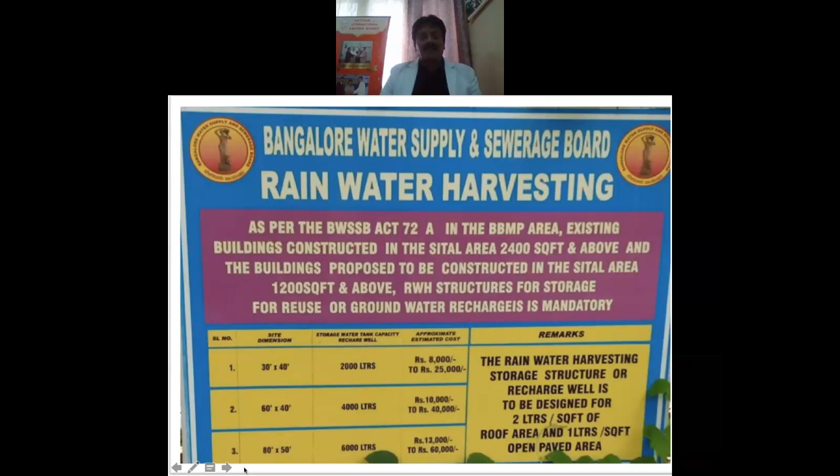Second is the use of faulty filters. More than 95% of the filters available in the market are not self-cleaning. They need to be maintained after every rainfall, which doesn't happen in houses or in the public domain. So after one or two rainfalls, these filters get clogged, and the whole rainwater harvesting system is for a toss.

When installing this kind of system, one thing you have to be very careful about: when putting a vertical pipe, just clamping it with a C-clamp is more than enough. But if you use the same C-clamp for a horizontal pipe, the whole system fails, because the weight of the pipe as well as the weight of the water when it's raining is on the clamping system. So the clamping system has to be very strong.

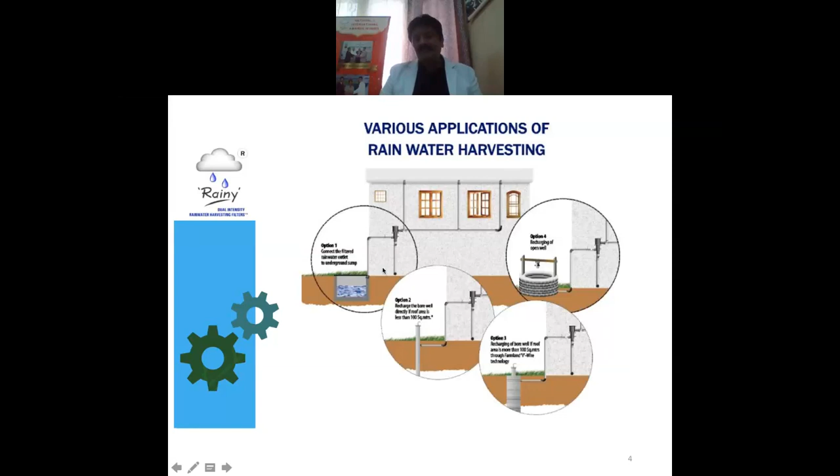These days, when we use hollow bricks for construction, it becomes even more important to fortify the clamping system so it can take the load of the pipe as well as the weight of the water, so it doesn't come off. Majority of the time, wherever we have seen, because of these kind of wrong clamps being used, the whole system comes off within 1 year. That is one of the reasons.

If you are not able to clean the leaves, dust and debris, the organic matter starts decaying after 45 to 50 minutes of falling. Then when there's a next rainfall, the whole degraded material passes into the water, and that's the reason you hear about worms growing in rainwater or rainwater smelling.

Believe me, rainwater is the purest form of water. If rainwater is stored in a tank with a closed cover where you don't allow sunlight and air, you can keep rainwater for 100 years. There are instances in India proved in Rajasthan and Jaisalmer areas, where old Havelis had rainwater tankas, hundreds of years old, which were closed. After 100 years, when they were opened and the water was checked, it was as pure as when it was put in. So rainwater is the purest form of water, which can be stored for 100 years without getting contaminated or stale. You just have to take care not to allow light and air to interact with it.

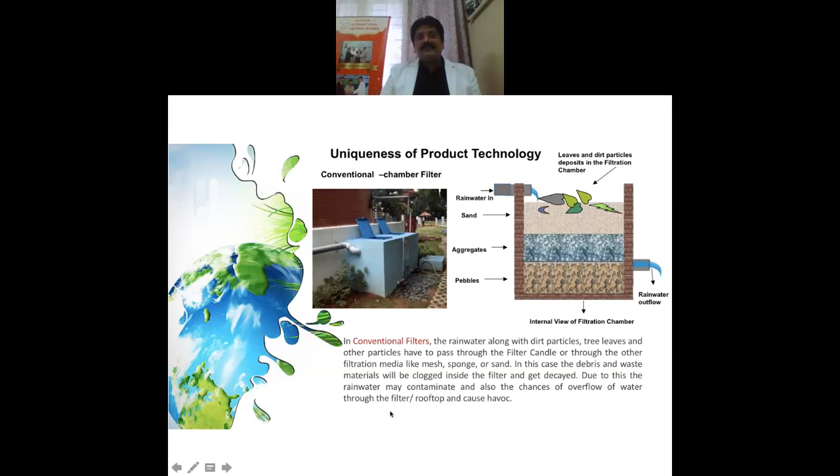Here are the filters you commonly see in the market. At the bottom side, you have a ball valve in all the filters. Whenever it rains, all the dust and debris come and settle down near the bottom of the filters.

And every rainfall, you have to go and open this ball valve, which in our busy schedules we fail to do. And because of this accumulation of dust and debris there, if you are not removing it after one or two rainfalls, the whole pipeline will get choked, and then it starts flooding on the roof. So that is one of the major reasons why rainwater harvesting systems have failed. Next.

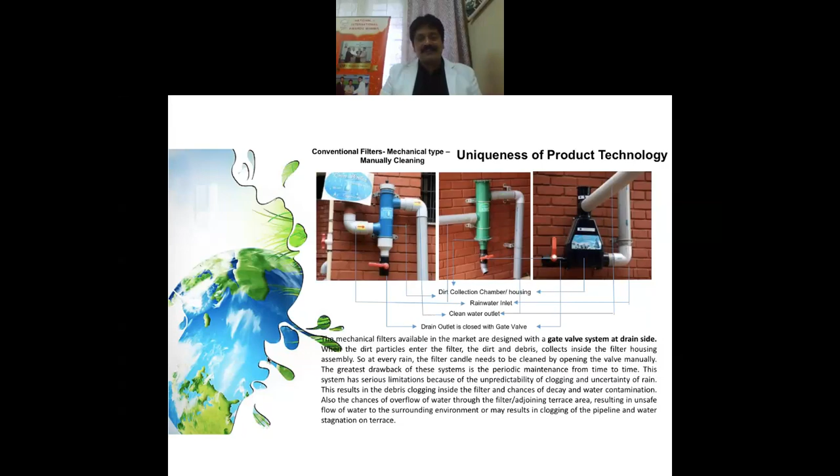Now in India, you will find the first of its kind filter which is self-cleaning and maintenance free. Why is it maintenance free compared to all the other filters available in the market? These filters are open-ended, auto flush-out filters, wherein all dust, debris, everything goes out automatically and the clean water comes out on the other side. These maintenance free filters have been developed after research of the last 5 years. Next.

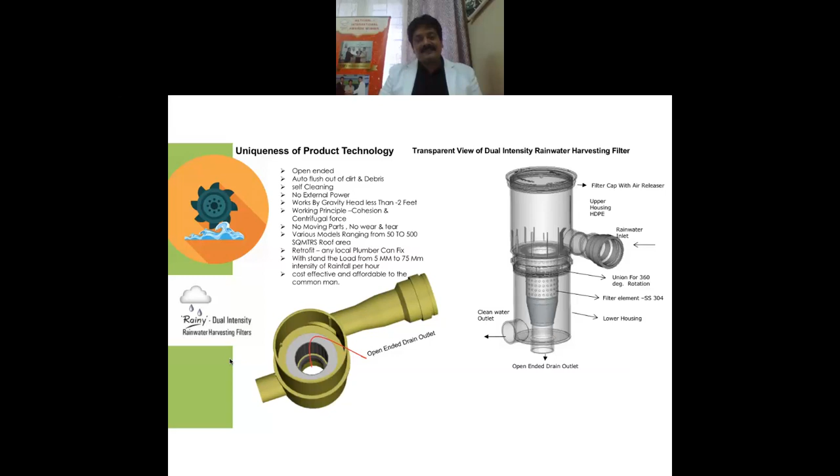In this filter, you can see on the left hand side the cross section of the filter. Here, all the dust, debris, everything falls out automatically, and the clean water comes out on the other side. One more advantage of this filter is that the first 90 seconds of water goes out. This filter works on cohesive force and centrifugal force. Once installed, for the next 30 to 40 years no consumables are required. Nothing needs to be changed.

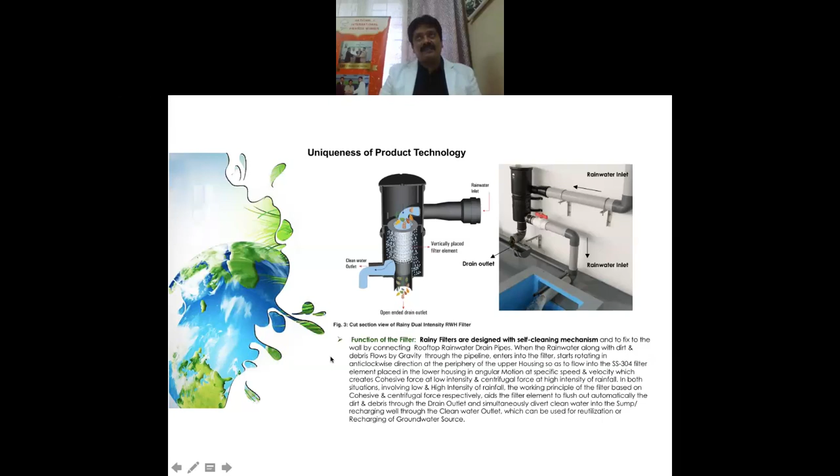So that makes it one of the easiest to install, and it is a retrofit filter. These are the kinds of filters which are available in the market, and they have become very popular today, where people have started using rainwater in a bigger way. Next.

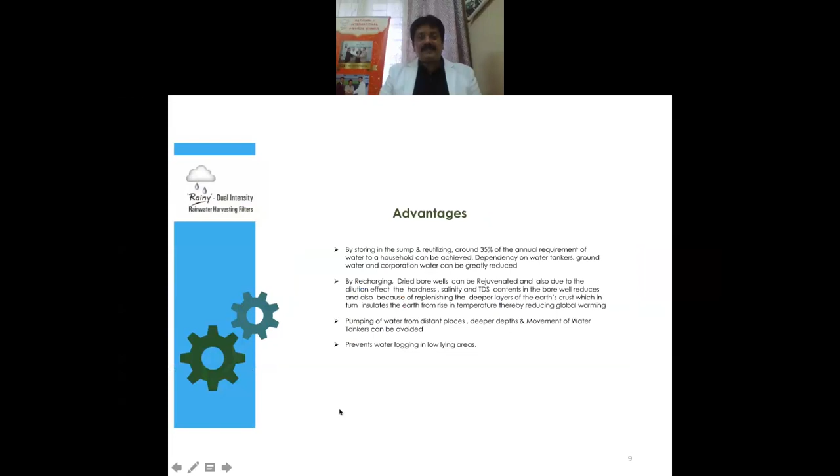Today people have understood the importance of rainwater everywhere, and large industries, schools, apartments, everybody has started understanding the importance of rainwater and adopted it. By adopting rainwater, you are not only doing a service to mother earth by saving water. From a commercial point of view also, the return on all the investment you do for rainwater harvesting comes in hardly 3 years' time.

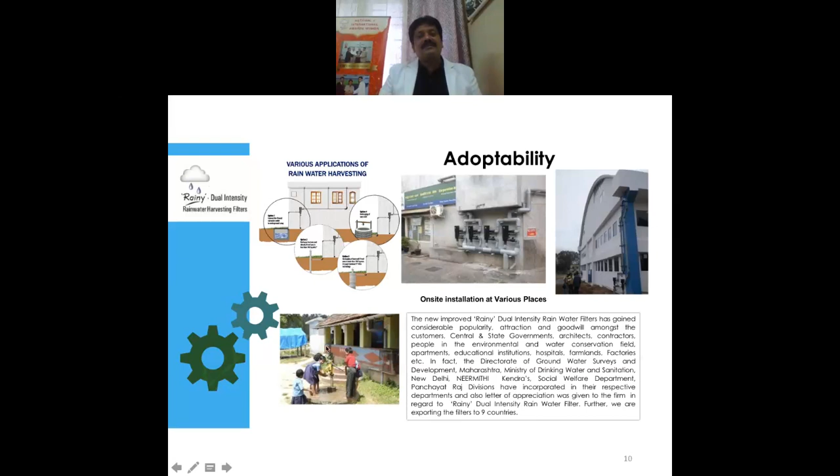Because you're saving on your water bill: for at least a minimum of about 150 to 180 days, with your existing tank, you can have enough and more water, so that for those many days you need not buy water from the BWSSB or your water supply, and you can save on your water bill. And this is a one time investment; it can run for at least 25 to 30 years without any problem. Next slide please.

See, today each and every state has started giving some perks to adopt rainwater harvesting. This slide you can see is from Bhubaneswar, Orissa, wherein the government has made it mandatory for everybody to go for rainwater harvesting. It is not only mandatory; they provide you a subsidy of 45,000 rupees if you install rainwater harvesting for your house.

We have done more than 2 lakh installations in Bhubaneswar and other districts of Orissa, wherein the government is giving you a 45,000 rupees subsidy to install a full-fledged rooftop rainwater harvesting and borewell recharging system. So today, the government is taking more interest. You have seen that the Jal Shakti ministry, a new ministry, has been formed this time, wherein they have allocated more than 3,000 crore rupees just to create awareness about rainwater harvesting. Next slide, please.

Next slide. Yeah. One more important aspect is recharging the groundwater. You have seen that groundwater is falling very critically. Every year they say the fall is more than half a meter in some places, and in some of the critical dark zones it is more than 2 meters. This is going on very drastically, and at this rate we will probably surpass the date given by the NITI Aayog for running out of water.

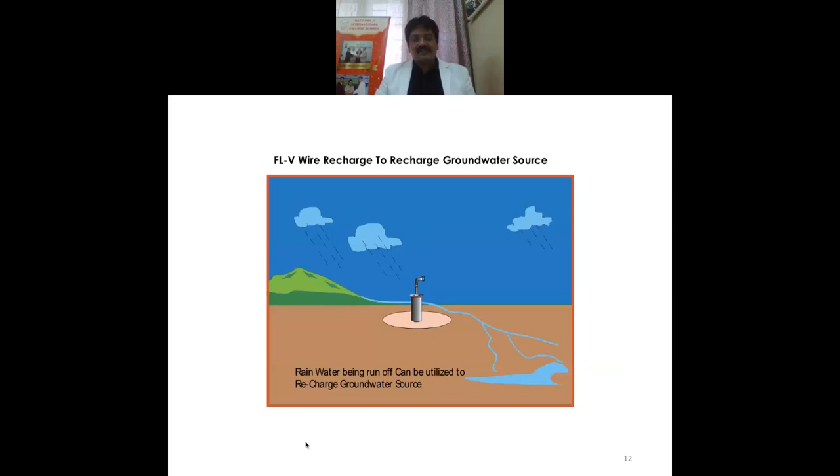Everywhere it is, you can see on the right hand side. Everywhere the government tells us that we have to go for pits: make a pit of about 15 to 20 feet, then fill it with gravel and brick bats, and then leave the water. But by our last 20 years of experience, we have seen these kinds of pits help us only

to recharge the subsurface. And if we had wells around, this would have been the best option, because it will recharge the subsurface. If you have the well and you are able to remove the water again and use it, then this is the best system. But now we have forgotten the wells, we have forgotten our olden knowledge. Our forefathers were more knowledgeable in water than we are today. They had enough and more water.

In those days when Kempegowda ji built Bangalore, they say there were about 970 lakes here. Today, in the name of advancement, or in the name of calling ourselves more intelligent, we have closed those lakes and made them into industries, bus stands and railway stations. Our own Majestic bus stand is Dharmambudhi Kere, and our stadiums were all Kere, meaning lakes.

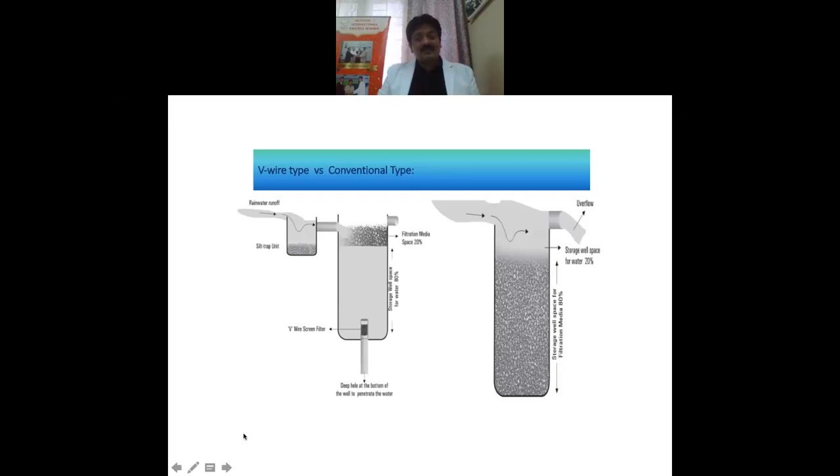Today we thought we don't need this, because in 1970 the borewells started. That is the period when we started drilling borewells, and today you'll be surprised to know that we have more than 22 lakh borewells in and around Bangalore. So where are we heading, if we put these kinds of straws into mother earth in this small area and extract water without recharging? How many days do you think it will last?

Because in the earth's crust there is no mechanism to produce water. The water which has taken millions of years to accumulate there, we are just putting motors in and extracting. That is the reason that out of 10 borewells, as I said earlier, 6 borewells fail, and hardly 2 remain after 1 year. So this is what is happening.

So what will happen to the next generation? Ashok sir and I have completed half of our lives and have hardly a few years left. But what happens to the next generation? What happens to your son, your grandson, and my young engineers who are listening to us? What will happen to you?

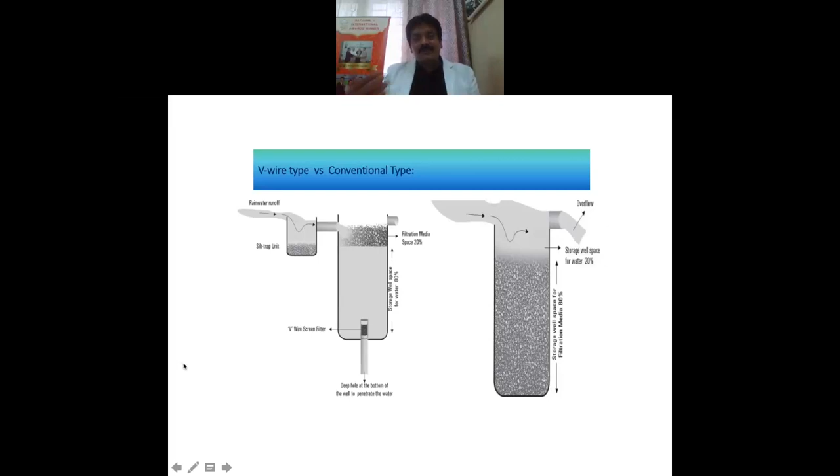Next. According to the BBC report and NITI Aayog, Bangalore will be the second city in the world to run out of water, and that too not very far off. It is 2025. They say 50% of the population will have to be evacuated. Imagine what will happen to these high-cost apartments and high-cost land when we don't have water. Can you imagine one day without water?

If you go to the Sarjapur area and North Bangalore, water tankers today charge 200 rupees for 1 kiloliter of water, meaning a tanker costs somewhere around 1,000 rupees. If this is the state, do you think we can buy water at that rate and survive? It is really impossible to think of.

I have seen in Sarjapur where they made swimming pools during the sale of the apartments. Today, those swimming pools are used to store rainwater. You'll be surprised to know they have converted one of the swimming pools to store rainwater. That is the stage we are heading towards.

Now coming back, I was talking to you about recharging pits. Recharging pits don't help to recharge your borewell. The best example is the many lakes around Bangalore. Each of the lakes has water 365 days. In South Bangalore we have Yediyur Lake, in North Bangalore we have Hebbal, and in the center we have Sankey Tank, Halasuru Lake and others. These lakes have water for 365 days.

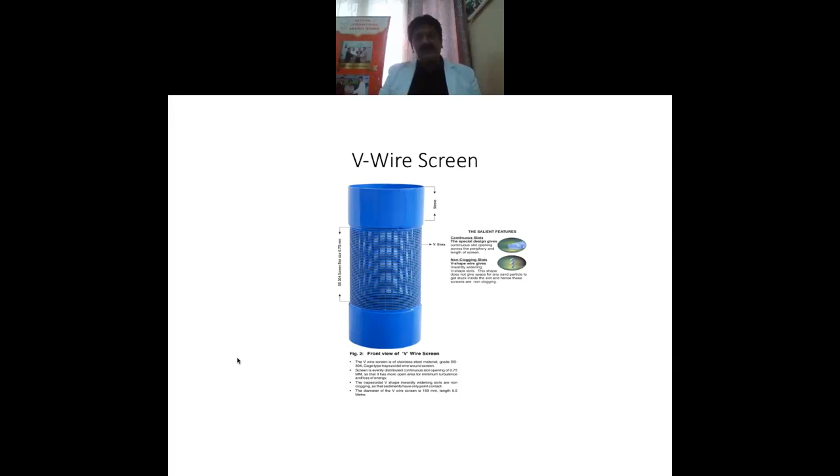Next slide please. So with our continuous research, we developed a system called the V-wire injection well, developed by our company Farmland Rainwater Harvesting System. In this V-wire injection well, we first do a geophysical survey and identify the first permeable zone.

After this overburden of clay and rock, we go to the first permeable zone, where we find fractures or we have got sandy loam soil or weathered rocks. So we drill it up to that level. An 8.5 inch borewell is drilled to that depth.

Once the 8.5 inch borewell is drilled, we use one special component called a V-wire screen. This V-wire screen is fixed at the bottom and is connected to the pipe, which is zigzag perforated high density polyethylene. In the 8.5 inch drilling, we put a 5 inch perforated pipe, and the space in between the 5 inch pipe and the 8.5 inch drilling we fill with pebbles. Then we create this kind of structure. You can see a structure over here, a kind of system.

In this well, we keep the whole well empty. Generally in the pits, they ask you to fill it up with brick bats. But we keep this whole well empty. Only at the top level we put the filtration media. We fortify this filtration media with charcoal, chlorinated activated carbon, silica sand, gravel, and pebbles. And then this is connected to a silt trap.

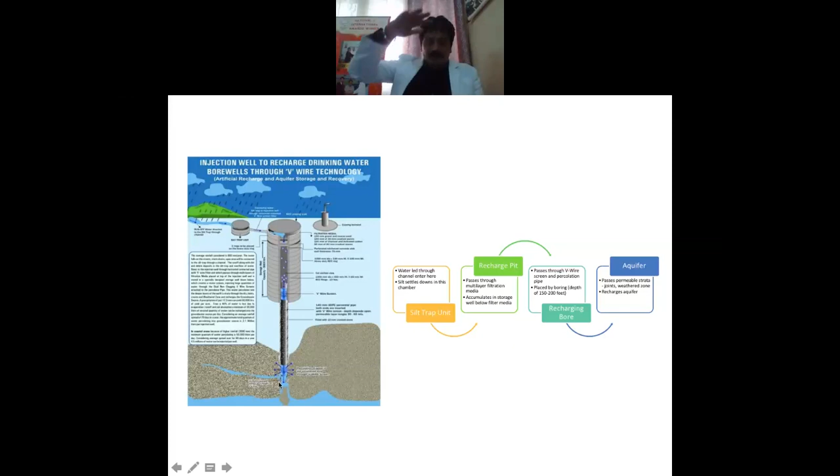If you measure the pressure at the bottom, you will find 4 bar to 6 bar of pressure created at the bottom. With that pressure, it opens up all the dry joints and cracks, and the water is stored there. Next.

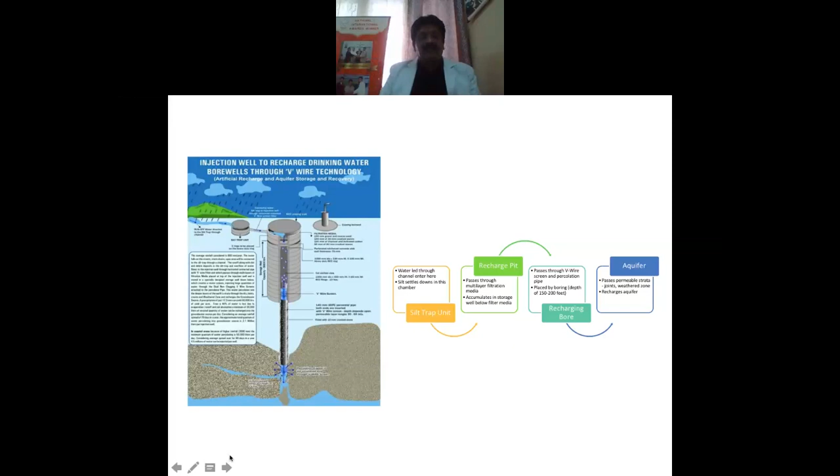We have installed more than 18,000 such injection wells throughout the country, and even dried borewells have been rejuvenated, because, as I told you, there is a huge potential of surface runoff water. Here in this slide, if it had rained, all the water would have gone down, and our borewell is at the right hand corner. You can see this borewell is at the right hand corner. So we installed one injection well system.

All this water, which would have otherwise gone to waste and caused water logging at some low-lying area, we allowed to go into the silt trap, and from the silt trap to the injection well. Generally we make the injection well about 15 to 18 feet away from a drinking water borewell. As I said earlier, this water is filtered through the filtration media and allowed to go to the first permeable zone. Thereafter it gets filtered through the earth crust and then reaches the aquifer.

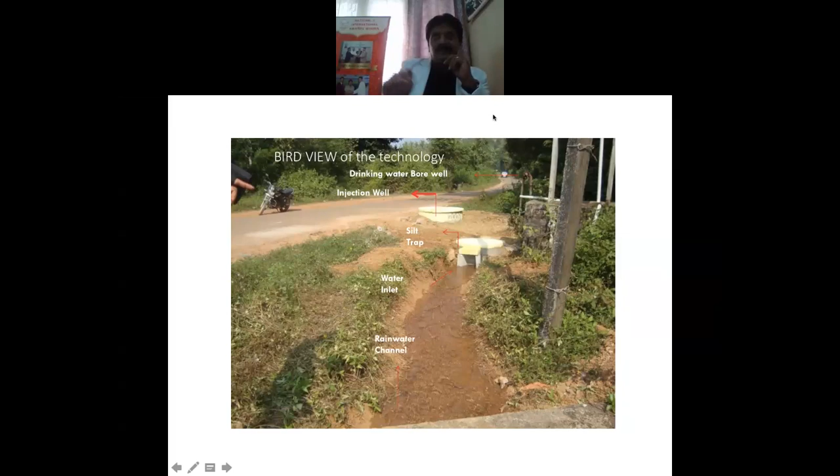You'll not believe it if I tell you 1 meter by 1 meter of compressed earth is the best filter in the world. No other filtration unit can match that kind of filtration. So the water is filtering through the earth crust, because our borewells are 800 to 1,000 feet deep, and we are just leaving this at the first permeable zone, which we generally get at a depth of about 140 feet to 240 to 250 feet, depending upon the different zones. Next slide, please.

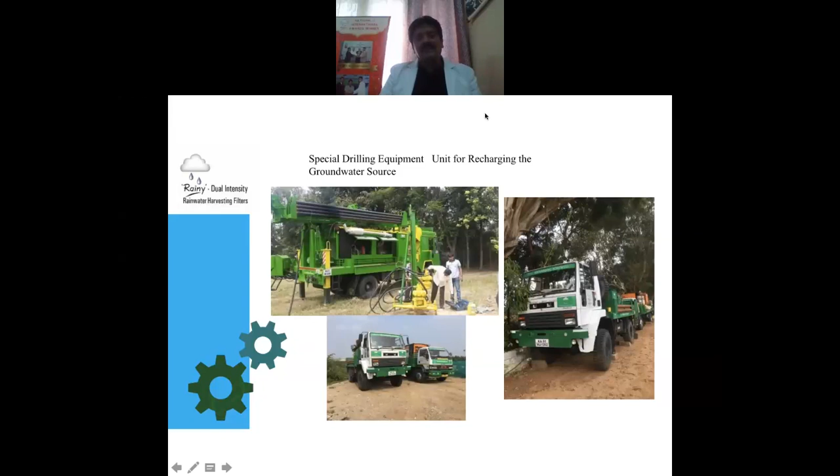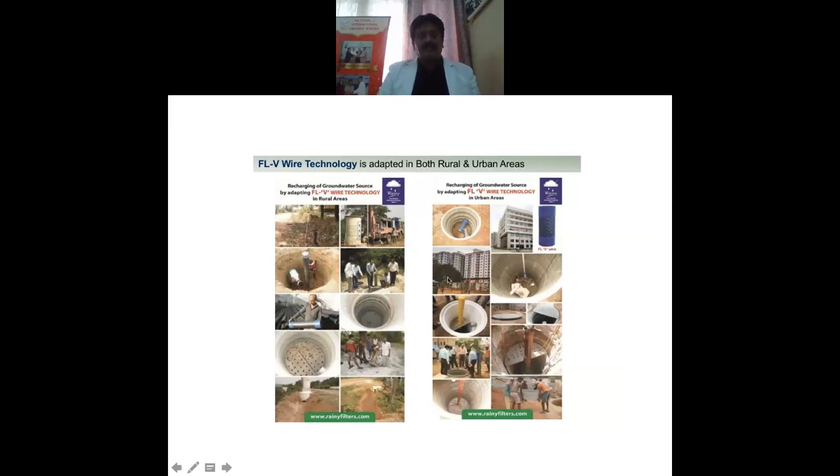These kinds of injection wells have now been used in urban areas, in the cities where there is a lot of waterlogging. You can see in Bangalore, if it just rains about 40-50 mm, the whole of Bangalore is flooded. Everywhere there is water stagnation, and the majority of the water stagnation is in the low-lying areas, where there is a loss of life and property.

Next slide, please. These have been proved and tested in each and every department of the Government of Karnataka and India. The majority has been in pilot projects. They installed it, and once they were successful, they were replicated in other areas. Next slide, please.

This is one of the beautiful case studies of one Mr. Bettamaraiah, a farmer near Tumkur. What happened was, when we met Secretary Sri Naveen Raj Singh sir, he said, I see a lot of good presentations from you, but I want to see how it happens in the ground reality. What is the ground reality?

So we were provided with one dried borewell of this farmer. He had about 3 borewells, and all of them had dried. Because there was no water available and the land was totally dry, his children had moved to the cities to work and earn. So we took up that borewell and recharged it. Fortunately, we had 2 very good monsoons after the recharge, and we could recharge the dried borewell.

You can see this photo was taken in deep summer. Only his land is green, and the rest in the backdrop is all dried. Because the water table came up, we could implement a solar pumping system. If there is a deep borewell with a deep water table, we still don't have sufficient pumps which can lift water from very deep aquifers.

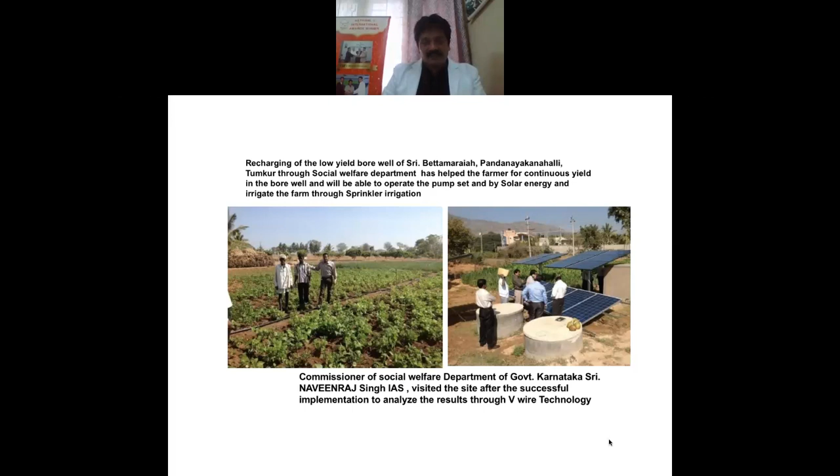A lot of industries have gone for rooftop rainwater harvesting, wherein they are using this rooftop rainwater even for drinking, with small filters adopted. You can see on the left-hand side, all the water is collected and passed through the Rainy filters, and then we have activated charcoal filters installed here, and this water is being used for drinking. This is one of the installations at Khanija Bhavan on Racecourse Road. Next slide, please.

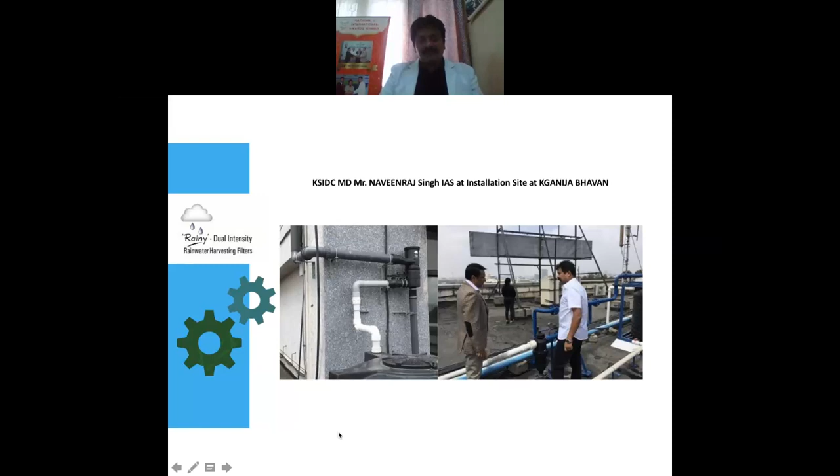In the majority of rural areas, in their drinking water projects, these injection wells were adopted. In Chamarajanagar, we installed more than 240 injection wells. When we applied for the Times of India Earth Care Award, a team of about 12 members, which included eminent scientists and people from different walks of life, came and visited Chamarajanagar. We had done about 240 recharging installations in 2010, and we applied in 2012.

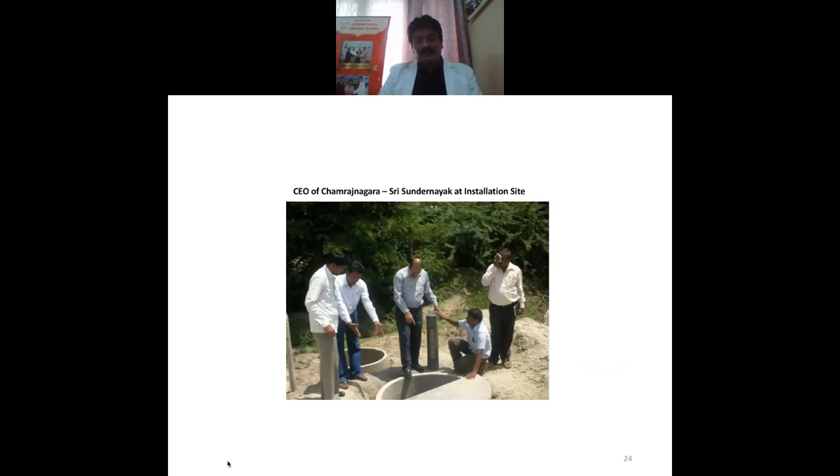When they visited Chamarajanagar, there had been 2 years of continuous drought and scanty rainfall in those areas, and they were surprised to find that only those borewells which had injection wells were working. We got about a 5 lakh rupee cash prize from Times of India for that project. Next. And then these were implemented and extended to more villages, because there were huge success stories. Next.

Here you can see these are in major IT industries which have very big campuses. Because the majority of their campuses have only buildings and paved area, huge amounts of water used to go out from these campuses. You can see the swales here. So we installed these injection wells in the swales, so that whatever water is on their campus doesn't go out. So the campuses became zero-discharge campuses.

One of the campuses in a software park, we did it in Chennai. There, 40% of their annual requirement is met by rainwater alone. And you will be surprised to know that the campus has 25,000 seats.

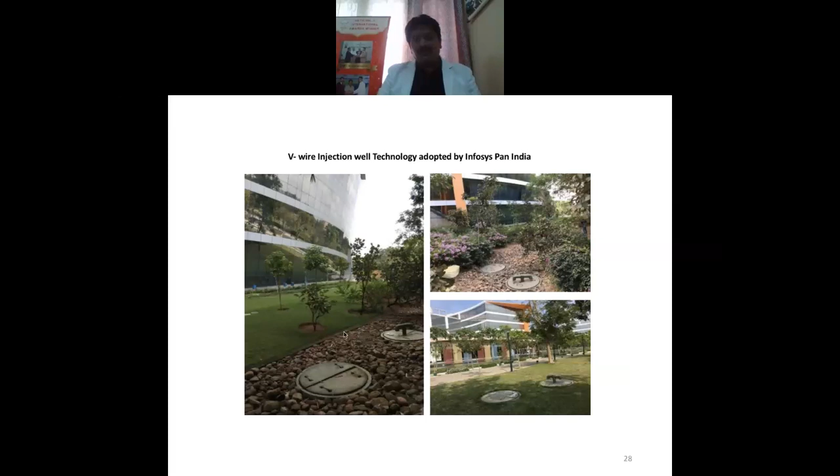With 25,000 seats, with their staying facilities and all, still they could do that; 40% of their annual requirement can be met by rainwater alone, and they recharge the groundwater in such a way that a lot of water was available there, and whatever water was falling in the campus is not allowed outside.

Here also you can see this water from the roof is brought, and then we created large tanks. Huge tanks have been created; this is about a 3.25 lakh liter tank. This tank was built by us, a very low cost tank. It is a low cost technology, and then this water is filtered through silica sand and activated carbon, and stored here for reuse. Next.

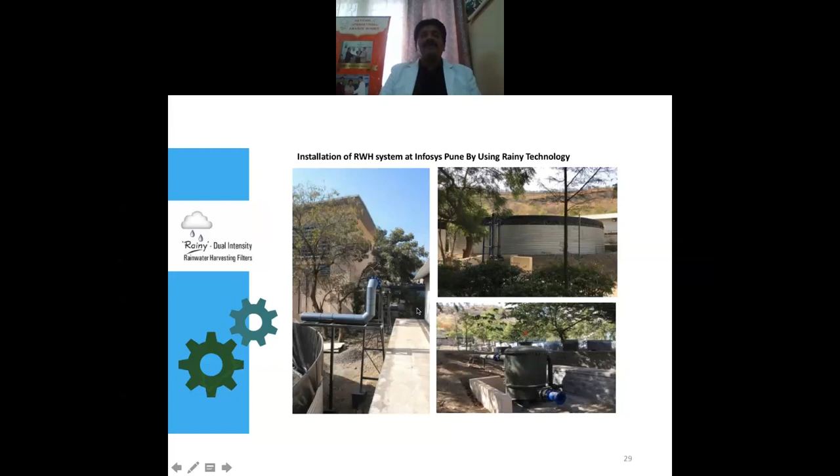Here you can see this campus has about 3,60,000 square feet of roof area. That means, for just 25 mm of rainfall, you will get about 7.5 lakh liters of water. All these downtake pipes were joined together and brought to a common point. Filters were fitted, and this water was stored and further reused. They had more than enough water, so they were thinking of selling it to the tanker fellows. So much water was getting collected in a small rainfall. Next.

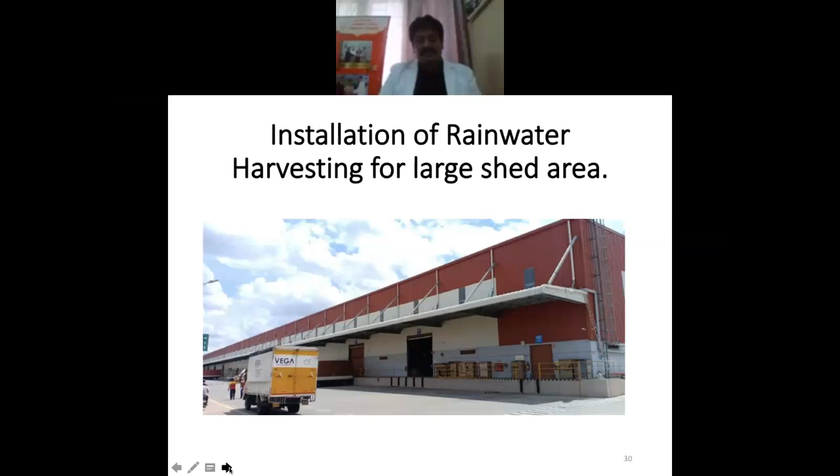Here, one more thing, because we have a lot of engineering students here: during installation you have to provide a proper overflow pipe. You can see here an overflow pipe. This will act as an air vent also, because when you run a pipe very long, there is a tendency for air blockage, so we need air vents. So this acts as an air vent and as an overflow pipe, because these days, due to change in climatic conditions, the intensity of rainfall is very heavy.

If you talk to our elderly people, they say, "Now the rains are not coming; in our times it used to rain so much." If you go to the meteorological department and check the data, you'll be surprised to know that not even a single bit of rainfall has come down. In fact, in some areas rainfall has increased. What they are telling is also not lies. But because of the change in climatic conditions, the intensity of the rainfall has increased.

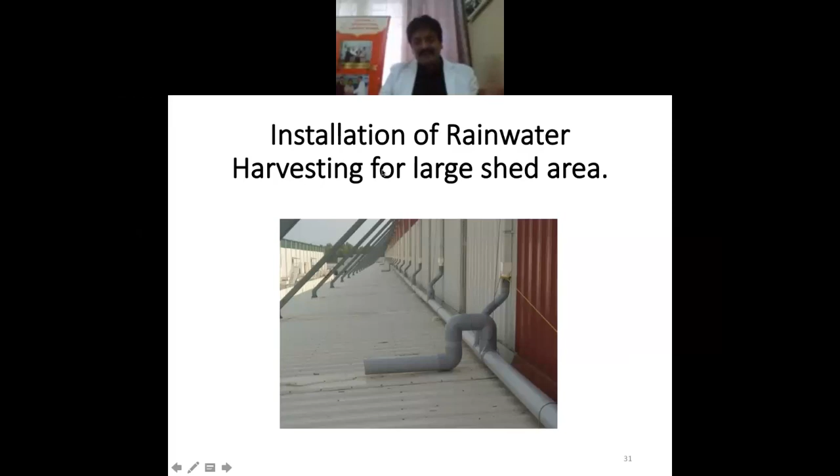In my childhood days, rainfall meant a minimum of 3 months of rainfall. Every day it used to rain, small, slow rainfalls. But now, you have seen rainfall in Bangalore recently. Suddenly in the evening heavy rainfall comes, so your total quota is matched. But with heavy intensity rainfall, one is that you are not able to store the water. Second, there is a large runoff and water will not percolate. Though our annual total gets tallied, still we will have a lack of water.

Next slide, please. Here you can see a garment industry where they required huge amounts of water, and they wanted demineralized water. They were spending a lot of money on processing water, because for dyeing they require demineralized water. Rainwater is the purest form of water, with TDS of just 35, as good as any RO water, and without any minerals.

They are connecting all their rooftops, because they have huge roof areas. Garment industries have about 3,000 people working and huge sheds. All this water is brought here and conveyed to a jack well system, or pumping well, made about 15 feet deep, and from the jack well it is pumped to the filter.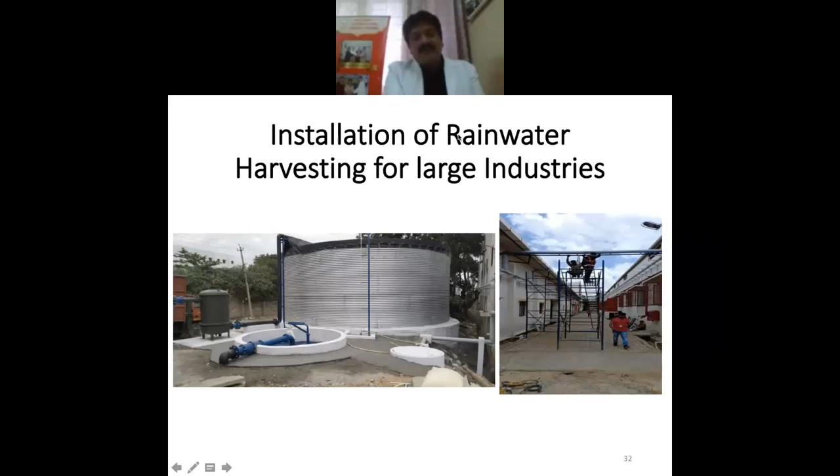Here you can see these are customized filters which can take the load from 50 cubic meters to 500 cubic meters; 500 cubic meters is 5 lakh liters per hour. Such filters can be customized, and then this water is fed into the tank for their reuse. Next.

What we have done here is generally what is happening world over: they have changed from PVC pipe to HDPE pipe, because PVC pipe is said to be carcinogenic for supplying drinking water. So world over they have changed to high density polyethylene pipe. Here you can see these gray color HDPE pipes, their life is also more, they have a lifespan of at least 40-50 years.

Here you can see we install water meters. We have installed these, as you can see at the end, the first figure on the left hand side. These are the water meters, because unless we measure it, we cannot save it. So water meters have been installed, one to calculate return on investment, how much water is saved, what kind of investment we have had, and how we are getting back the returns. You can see these air vents also, and there is a huge piping system.

These kinds of air vents have been put. So this is how a typical installation takes place in bigger campuses where you have to store huge water and reuse it. On the right hand side there is a jack well system with a pumping system, with all the ball valves. These are all customized designs which we have installed in many of our industries throughout the country.

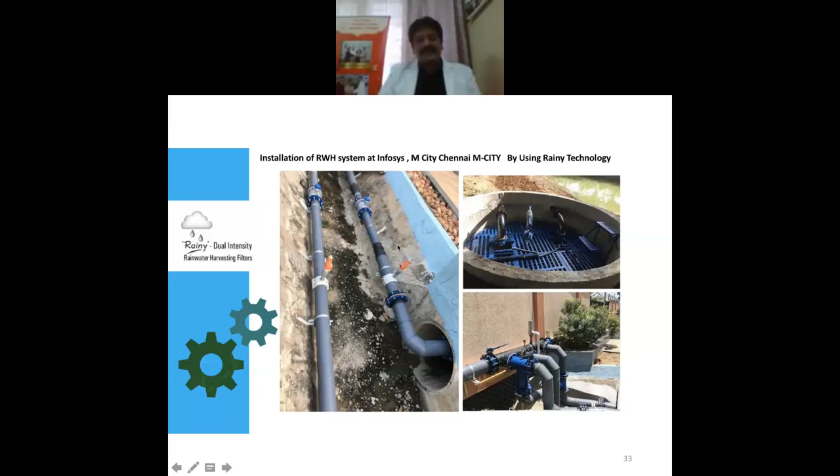This is part of the same installation, wherein you can see on the right hand side these are V-wire screens, horizontal V-wire screens, so that when the water is coming, all the leaves and floating particles stay here. Only the clean water comes from the jack well system. From the jack well system, this water is pumped to the filtration unit, and from the filtration unit, this water is pumped for the utility.

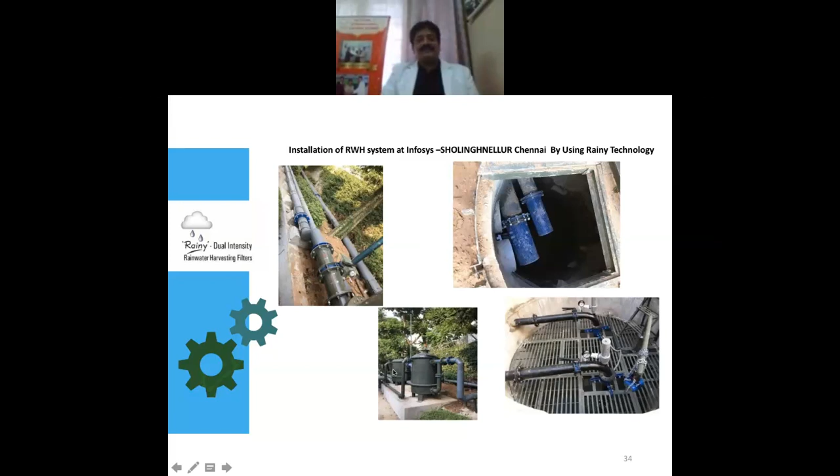In smaller areas, with smaller rooftops, filters are available in about 4-5 types depending upon the roof area. But when you have larger roof areas, you can put parallel filters like this. Here in this figure you can see about 6 filters, meaning this covers about 30,000 square feet of roof area, each filter covering about 5,000 square feet.

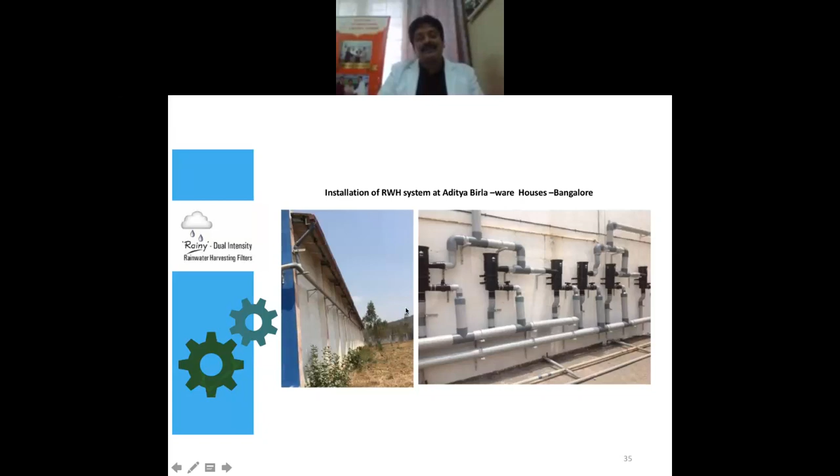All this clean water is connected to a single line, the wastewater line is connected on the other side. This way you can save a huge quantity of water. 30,000 square feet of roof area gives about 30 lakh liters of water annually, so that's a huge saving.

So that's why we provided this water through a hand pump, a different, innovative type. We said we should provide them a hand pump, so that whenever they want water, they should use some energy to pump and get it.

This is again about 3,600 schools in Assam, where we installed this rainwater harvesting system. Here also, on a platform at a height, we created about 10,000 liters of tank capacity, and the filter was fitted at the top. This water was used by the schools there for cooking their midday meals.

In Assam, though they get heavy rainfall, there is a lot of iron content in the groundwater, which becomes a huge problem for the filtration unit. So rainwater was the easiest and cheapest available source for them, since they get about 3000mm of rainfall across more than 100 to 150-160 days of rainfall. This was sufficient for their daily needs, so they could use rainwater and avoid the filtration cost, the huge capex investment, and the maintenance cost for filters.

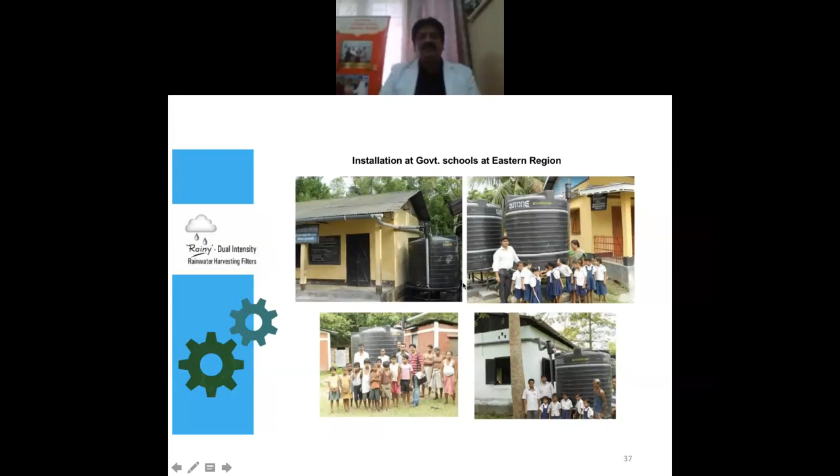Next, this is the Konkan Railway, from Madgaon to Mangalore. This whole area gets huge rainfall, about 3,000 mm average annual rainfall. But during summer, from February, because they are very near the sea, seawater ingress happens, and their borewells and open wells start getting saline water. So we started installing these structures to push the rainwater back into the open wells, and because of that, the seawater ingress stopped.

This was first installed in Tamil Nadu also during Jayalalitha's time, when she first started these recharging pits in Triplicane and those seaside areas, where seawater had started coming into all the borewells and wells. That is the reason rainwater harvesting in a massive way was first started by Sri Jayalalitha, to put water back into the earth and avoid seawater ingress. This was adopted long back, and still these are working fantastically well.

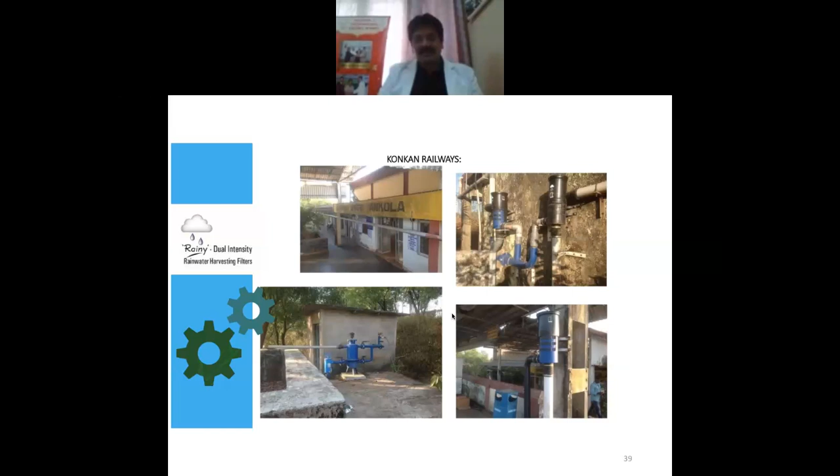Next, these are some of the larger industries where they have installed huge buildings for rainwater harvesting.

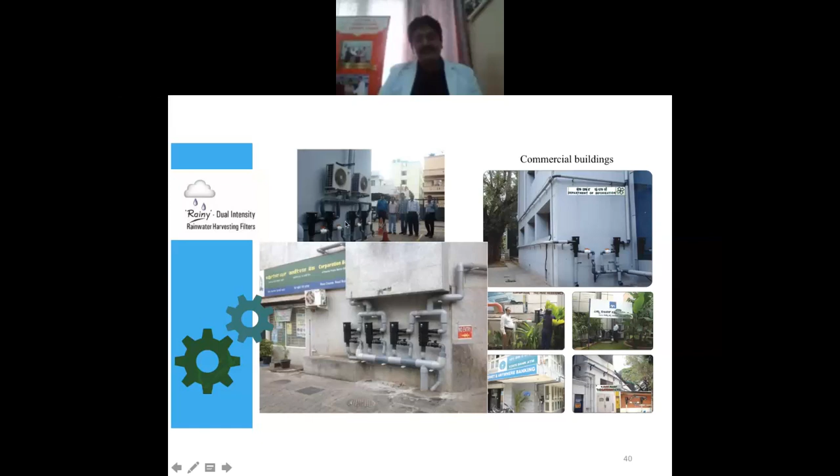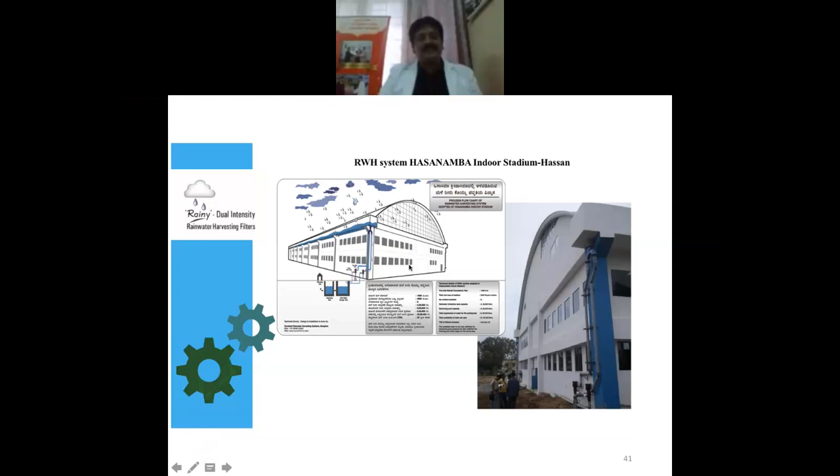This is one of the unique installations in Hassan - an indoor swimming pool. You'll be surprised to know there is no water supply to this swimming pool; it uses its own water supply from its roof. They constructed a 2 lakh liter tank, and all the water from their roof is collected and filtered through rainy filters, then stored in this tank - they get enough and more water than they require, and are even able to supply the nearby community. This is self-sufficient. If a swimming pool can be self-sufficient, our houses can also be self-sufficient. As I told you earlier, there are so many houses in Bangalore which don't have a water connection at all.

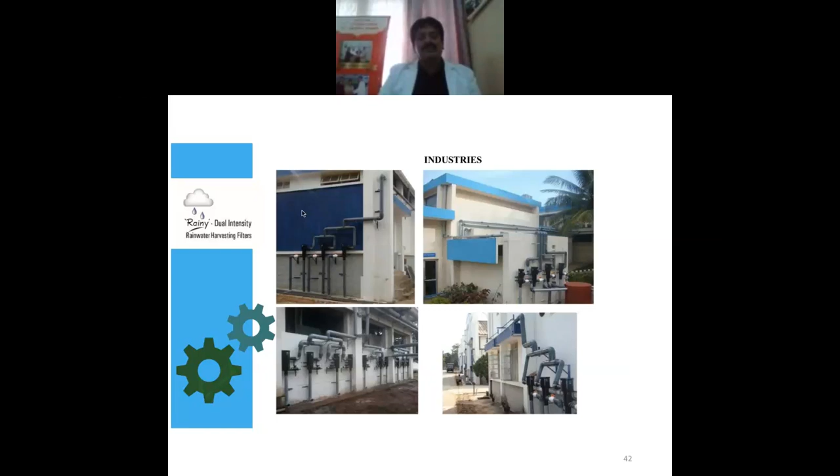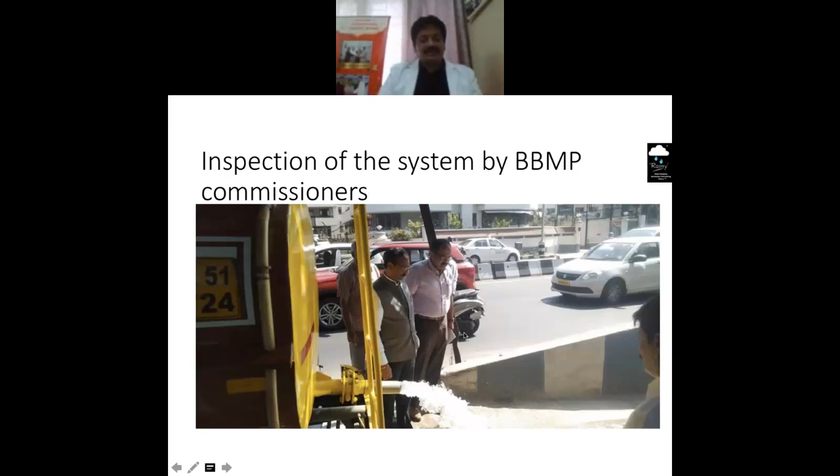Next, one more important advantage of this injection well is to avoid waterlogging problems. Recently, you can see our BBMP commissioner sir in this picture, where tanker water was brought into the underpass and a V-wire injection well was constructed. As you may be aware, during even small rainfall, all the underpasses in Bangalore choke up. It becomes an endangered thing for life and property because of water stagnation - vehicles get damaged, people fall, life and property are damaged. So we constructed the injection well in the center of the underpasses, and it was tested - we got about 10,000 liters in a tanker, and in 7 minutes this 10,000 liters could be percolated. Thereafter, we got a pilot project to install injection wells in all the underpasses.

Next, you can see here how this injection well works in the underpass. You can see on the side of the wall how much water used to stagnate - that dirty mark shows how much water used to be stagnant here.

Now with the injection well installed here, we have got a silt trap system, then an oil and grease trap, and then we have got the main injection system.

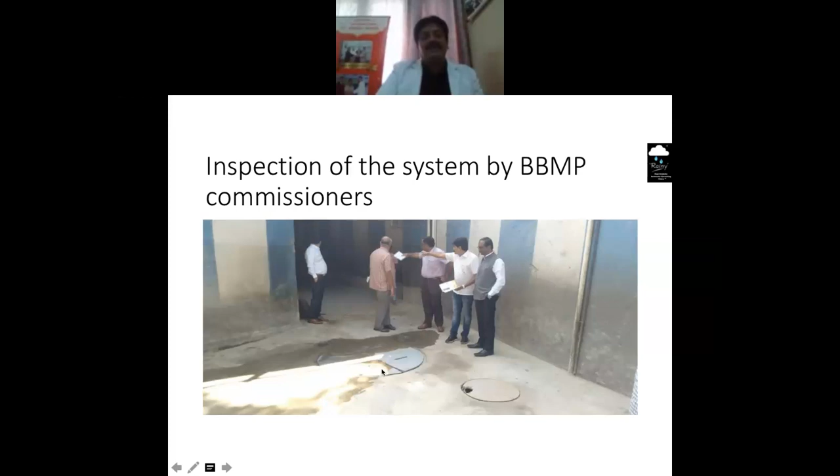Next slide, please. You can see here, Commissioner sir is watching because the water is led from the tanker and how the water is getting percolated into the ground. It has been very successful - even during a recent rain when we had 104mm of rainfall in 4 hours, not even a single drop of water was stagnant in this underpass.

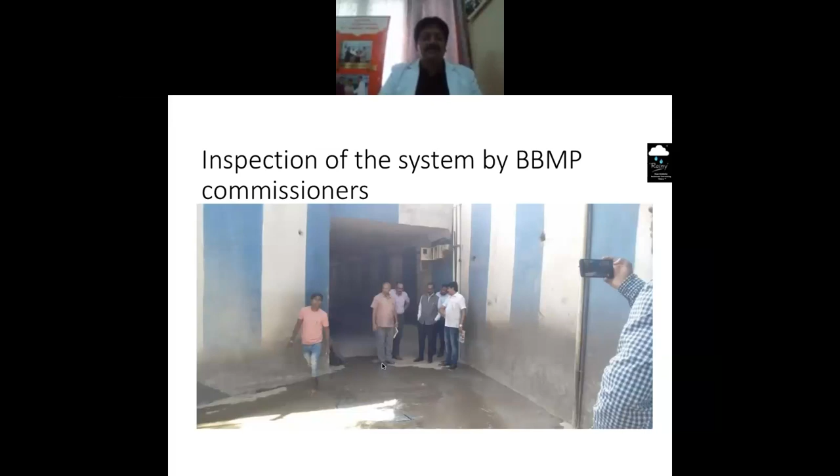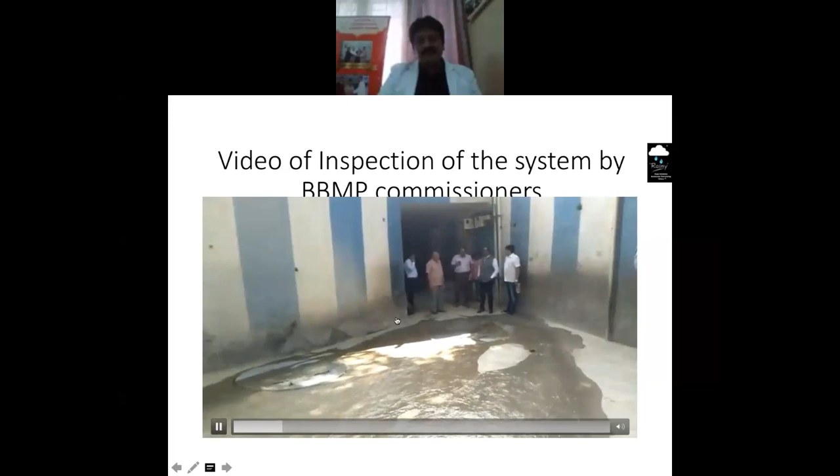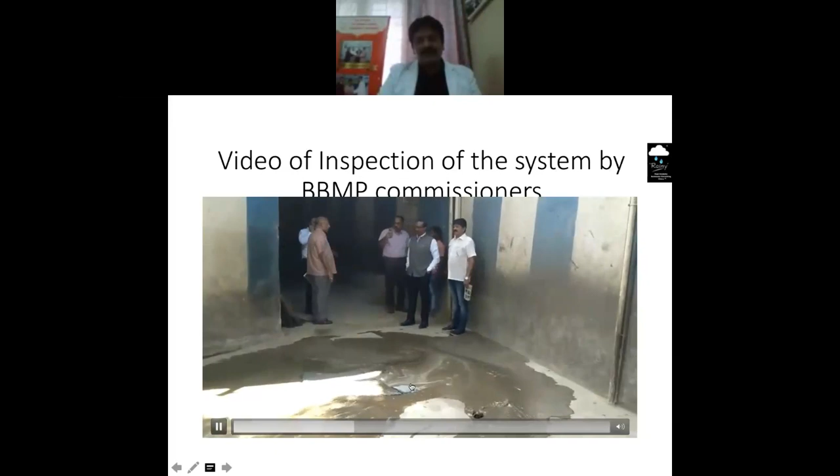Next, there's a small video you can see if it's able to play. You can see this, all this water is coming, and we have got an inlet over here, and nearby we have got a grease trap, so the water is entering here. All this water is entering from here, and it goes to the silt trap first. From the silt trap, it is allowed to go to the injection well.

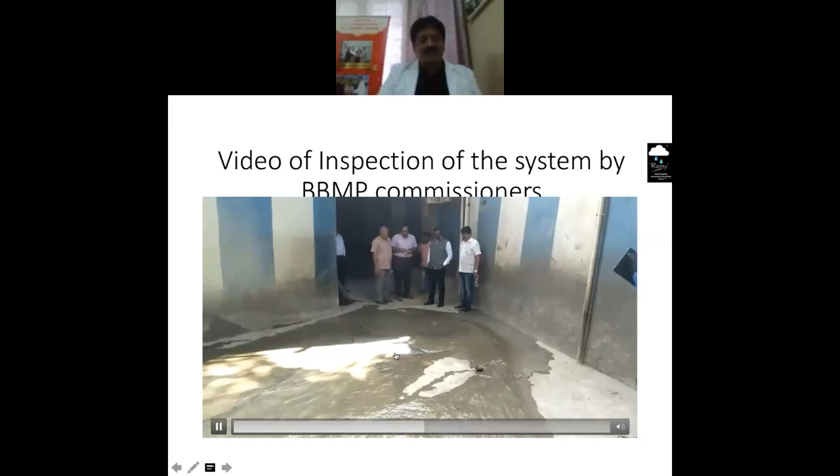There again, it gets filtered, and this filtered water goes to about 240 feet, which is the zone where we have found the permeable zone. You can see the tanker water is let inside to test this.

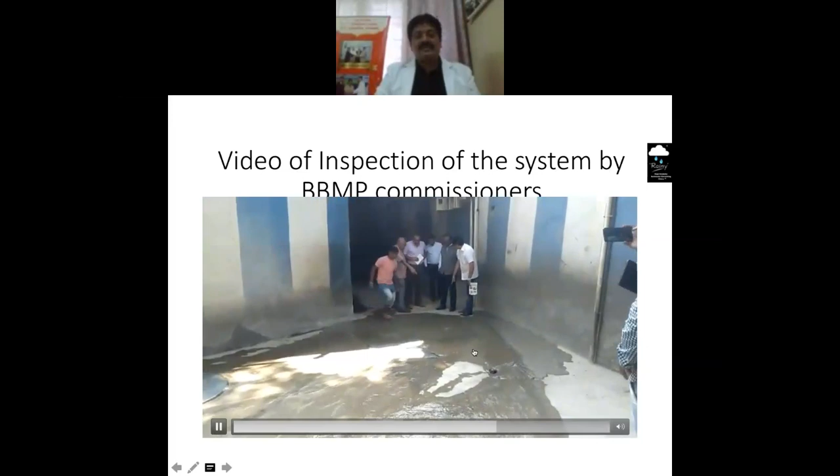We have got a research station at Chikmagalur, where we train people who really want to be water warriors, who really want to implement this kind of rainwater harvesting system. We train the people free of cost.

We make them water warriors, because today it is the need of the hour that all the young engineers learn to make self-sustaining houses, which is very, very important, because tomorrow, if you are not able to make houses which are self-sustaining, these houses will be of no use.

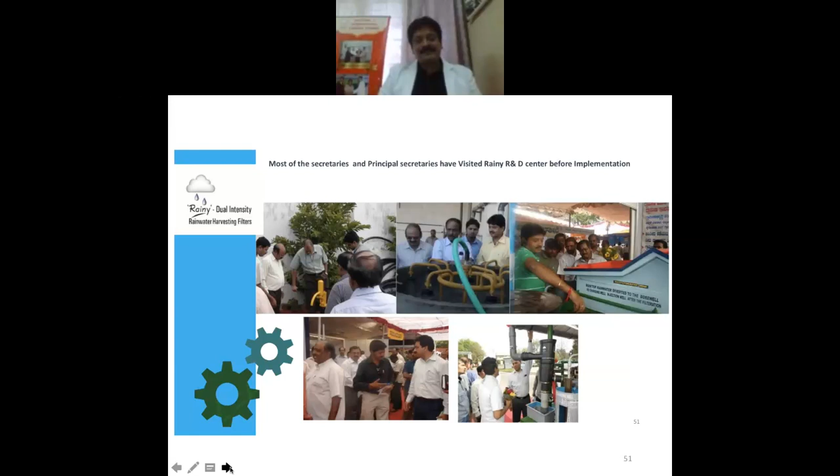Okay, if any questions are there, I would love to answer. Questions are there, we'll see over there.